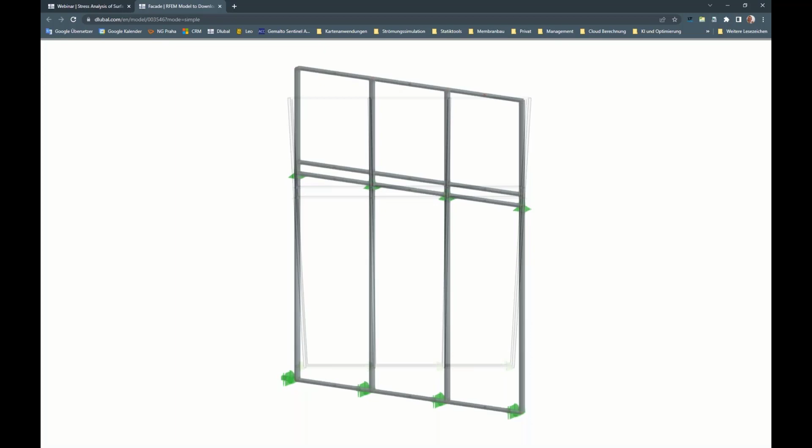Of course, in my style, I always want to present all these features in a short story, and therefore I prepared some models. For this webinar, on the bottom here, my colleagues already uploaded the models I want to present today, and we will start with a facade model from members.

Here we model it and we try to design the members by stresses. Then we fix this facade on the concrete slabs by modeling such a console. Here we take care about design of surfaces and design of welds between this angle and these ear sheets.

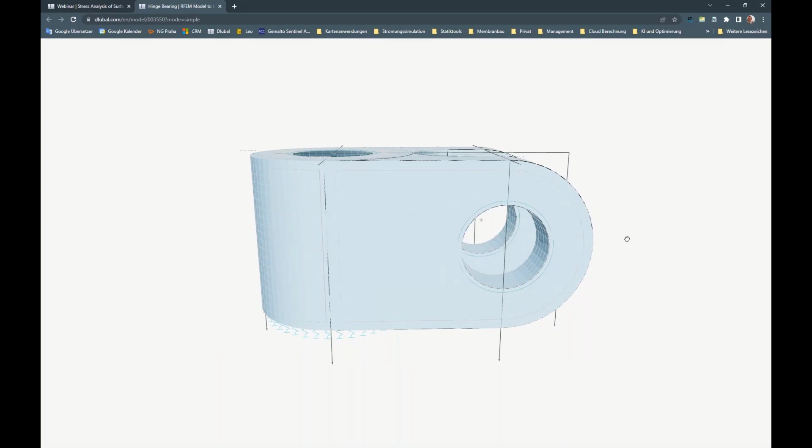And last but not least, we take a look at a solid model. I want to show how you can design such solid models with the add-on, how you can detect stress ranges, and how you can do solid sections. This is the introduction to what we want to do in the next hour. And now I change directly to RFEM. I prepared an open RFEM here.

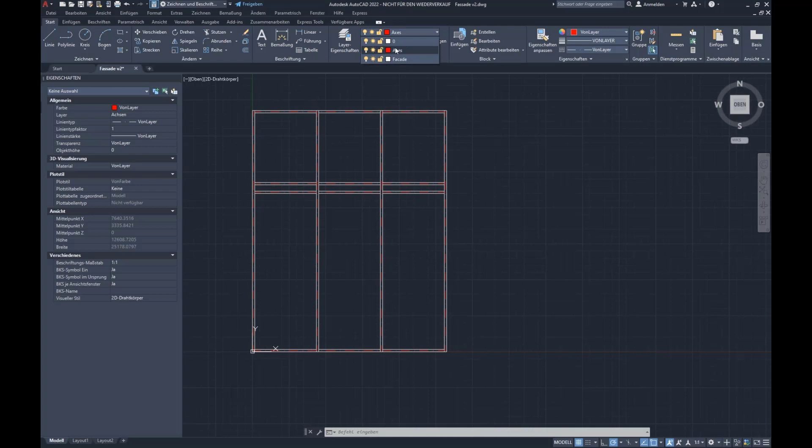Of course, we can start modeling this facade by giving this grid. But when you're starting modeling facades, you always will start with a drawing from the architect. I prepared such a drawing in AutoCAD with 2 layers, one with axis, one with facade. And I take over this geometry directly from the opened AutoCAD sheet into RFEM by using the import function. Here's this direct interface to AutoCAD.

This is quite comfortable because you don't have to take care about geometries and you can take it over directly. The only question the program wants to know is how it should orientate it, because AutoCAD has a different coordinate system than RFEM, but our developers implemented a nice option to rotate or mirror it. For this model, I would say the y-axis is Z, and the z-axis we will mirror.

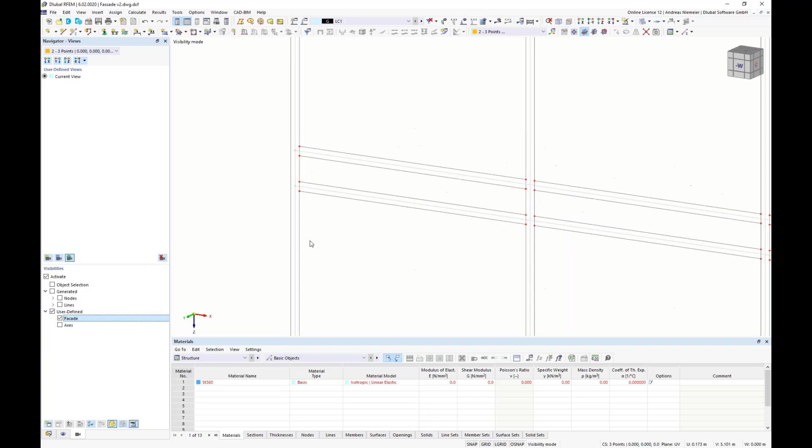To be organized, we say, please take over the layers from AutoCAD into visibilities. If we confirm the dialog, you will see the facade appear in the background. As expected, we get 2 user-defined visibilities, 1 facade, the outer layer, and 1 axis layer. For our purpose today, we only need the axis layer, so the facade part we will delete. I select it and remove it.

So now we know exactly how big the facade is, what the dimensions are, what the grid spacing is, and we can go ahead modeling this structure. For this, of course, we take a closer look at this model and see, okay, they drew this facade with the lines from left to right and drew over these mid elements. This is not really suitable for RFEM because you have to define some contact definitions. So we repair it with this intersection function and create single lines.

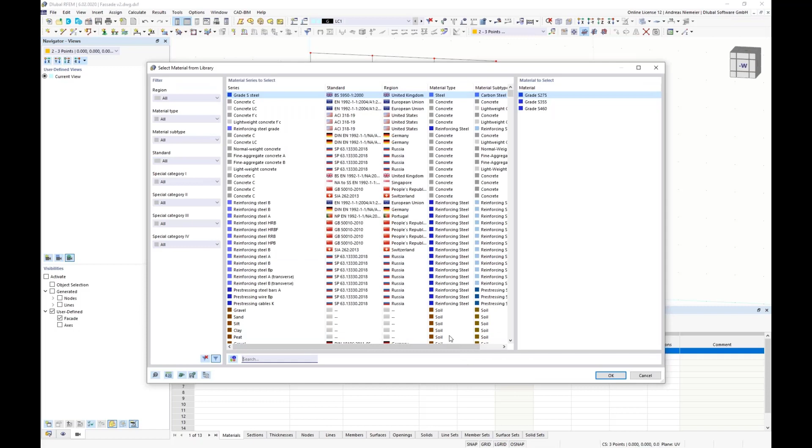In the next point, we try to add members with suitable cross sections, and for this I prepare material and sections before. Therefore, I open this material table. You see the program already defined a steel with sections from the AutoCAD drawing, but we don't need a steel, we need an aluminum here. Therefore, I delete this import and define a new material by using the keyword search 6060 and select, for example, this T6 aluminum from the Eurocode solution and confirm it.

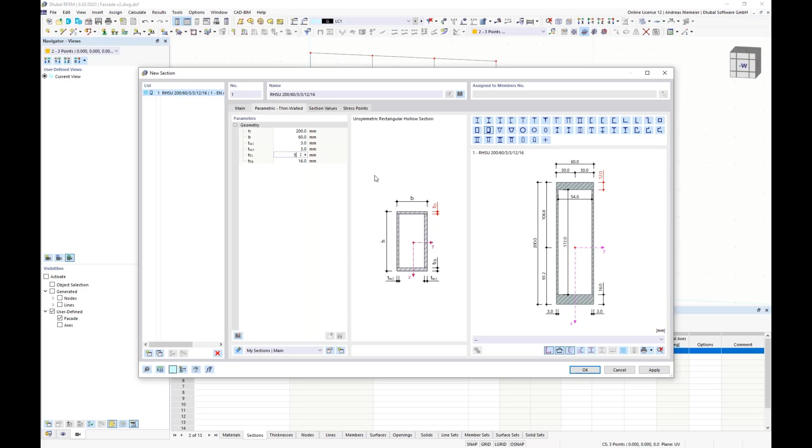Next, I go to the section register and define the cross sections. These two drawing sections I delete and define two new ones, one for the columns and one for the horizontal elements. For the columns, I open the library, and because it's an aluminum facade, I have a rectangular hollow section, and we prepared a special cross section for this. It's a rectangular hollow section where you can specify the thicknesses individually, which allows you to simulate all these cases simplified. I define a height of 200 millimeters and a width of 60 millimeters, for the thicknesses 3 millimeters in both directions, and for the short thicknesses I use 5 millimeters.

And because we have a similar cross section for the horizontal members, I select this already defined cross section, copy it and modify it so that it fits. So I change it here to 180. Okay, now we have prepared everything and we can start assigning.

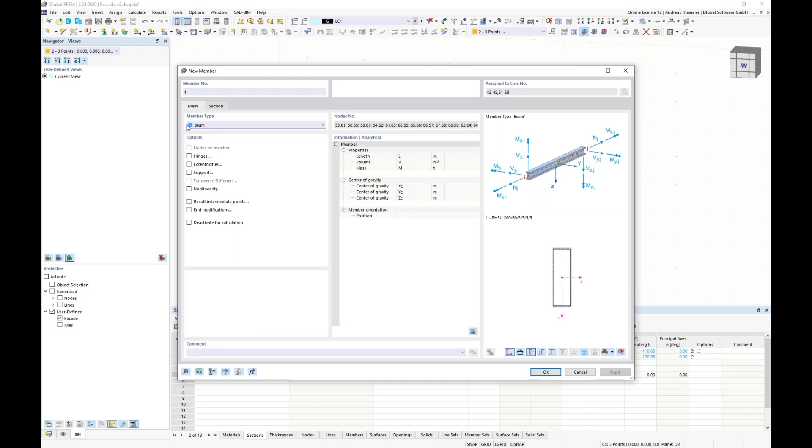So I select these vertical lines by pressing Ctrl at the same time, go into the properties of the line and select the option member. This tells RFEM that it has to apply a member with a specific type. We use beam, and as cross section we use the first one, and after confirmation the program distributes this cross section to these lines. The same we will do for the horizontal elements. So we select them, right click, edit, members, the same action as before. The only change is that we use the second cross section.

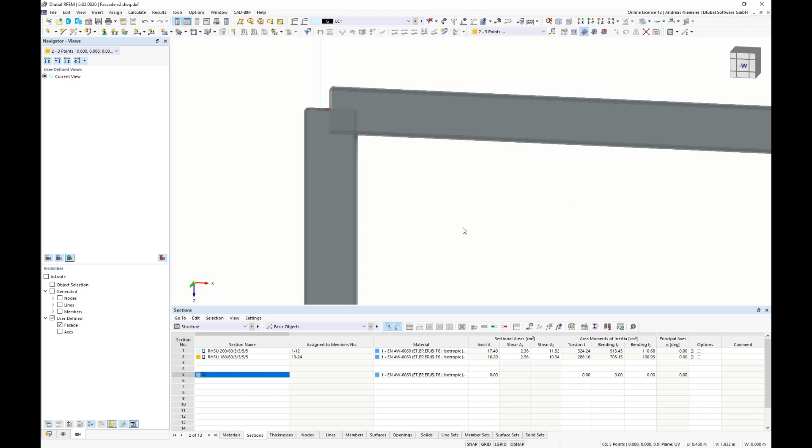So far everything was easy. If we now take a closer look at this facade, we will see that the program has rotated the cross section in a wrong orientation. This comes from the basic definition of how the members are placed in space, but it's not a big deal because we can open the section list, select both cross sections, use the section rotation and define, for example, 90 degrees. After confirmation, you will see the program orients the cross sections as expected.

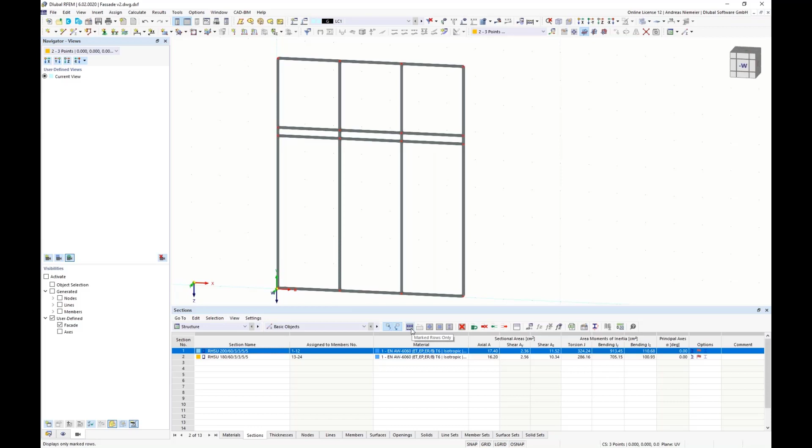So far, we have now defined the grid of members, and we can start adding additional properties like, for example, hinges, and bring in some organizational stuff. For the organization, it's interesting: when I move my mouse cursor over these members, you will see only the elements between the horizontal elements are selected, but in reality these elements belong together because they're manufactured from one beam. Therefore, I select all these members and say in the context menu, members, please be a member set. The program realizes four different sets, and now we have defined them as member sets.

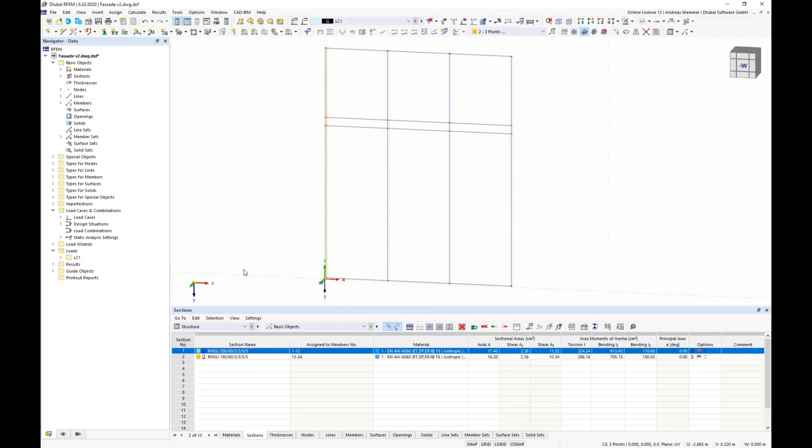Next, I want to introduce a new, let's say special feature from RFEM, which should help you with organizing the structure and also with design. Please open the base data, open the settings and options register, and you will find at the bottom two options, member representatives and member set representatives. We will activate both, and if we confirm it, you will see red bubbles above the members, and you will get two items with a setting.

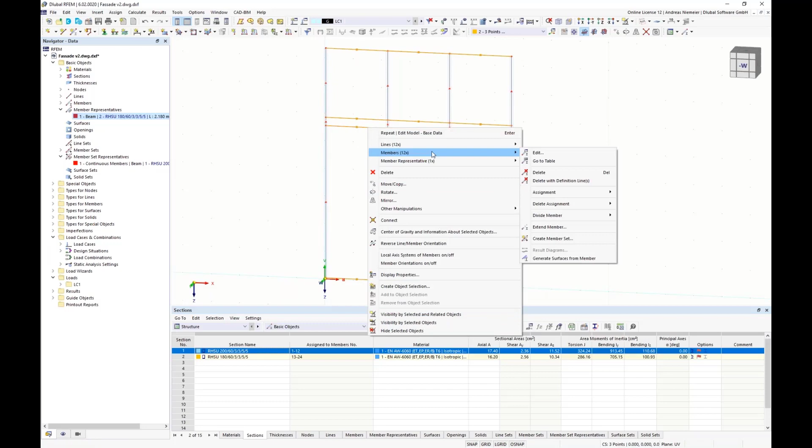This means the program realized we have similar elements for these horizontal elements, and also similar elements for these vertical elements, and it could be many more. So the program realized two unique positions from these 24 different members. And this is now easy because we can use these settings for defining some stuff, for example, hinges. I can select all by using this option and say, yes, of course, we have a hinge on both sides.

And later we can use this definition for reducing my documentation, because I can document only these 2 elements, because it uses the biggest forces of all available elements and outputs it in this definition. But I will show you when we have these results.

Now the structure is so far ready to apply boundary conditions. Here I'm starting with the load boundary conditions, which means we create the load cases self weight and wind. For self weight, I open here the list. We can define here the name, self weight, and then we take a look. Of course, the self weight is activated here, but we also have to consider the weight of the glass.

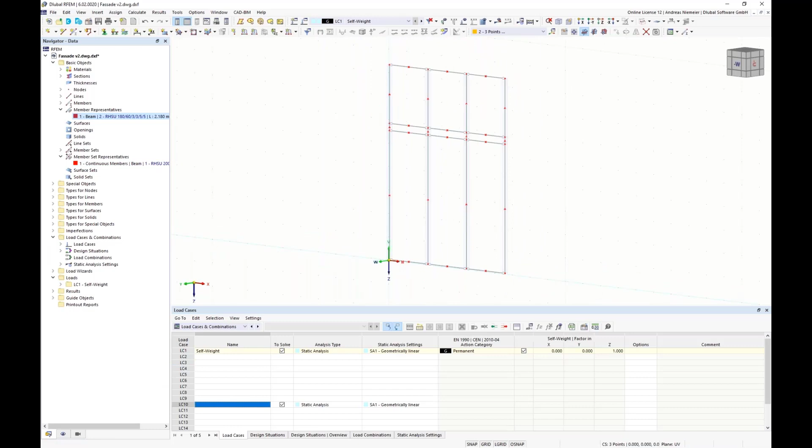And if you have to model such a facade, you know the glass is not inside the members, it's in front of the members. Therefore, it brings us a torsion bending moment on these horizontal elements. And how can we consider this? We can consider it with a load, and to know where the eccentricity should run, we activate here a member axis system. This shows us that for all elements, the z-axis points into the monitor. So if we assume the glass is in front, we have to define the eccentricity in -z direction.

Now, let's apply the load of the glass panels in front of the facade, and here we take a member load with type NX, where I can say, okay, let's define here 3.75 kilonewton, 2 pieces of it, and we place it here at 10% of member length plus 80. And we define here a load eccentricity, which should run in Z direction with -160.

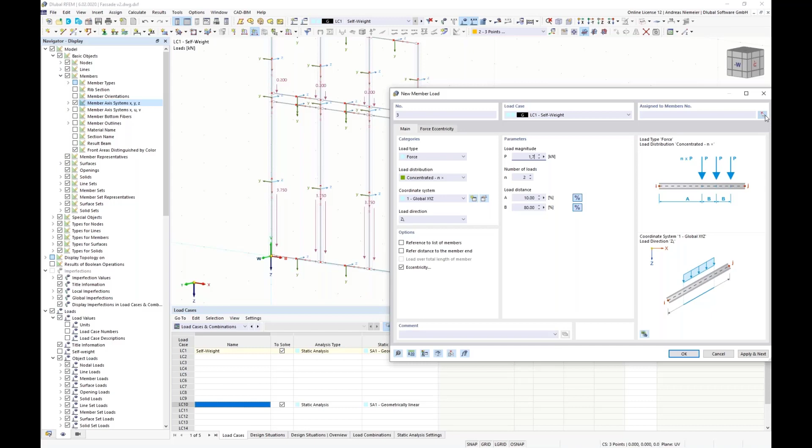So now we can say this load should be applied on this member, and for the others we do it similarly. So if we close the dialog, we can take over the basic settings with this overtaking function. And now let's write here 0.2 for the small panels. So let's select these members, apply and next, and the last one is 1.7, and here are these 3 members. So this was a quite easy task to apply such loads, such dual point loads. And now we go over to the next load case.

For me, it's important now to present this stress strain add-on to have some different load cases. So we need something. In this case, it's a facade, so we apply a wind load. Here I use the category wind. Okay, and let's apply the wind with a wizard. Here we offer a member load from area load wizard, where we can say the load could be, for example, 0.7 kilonewton per square meter.

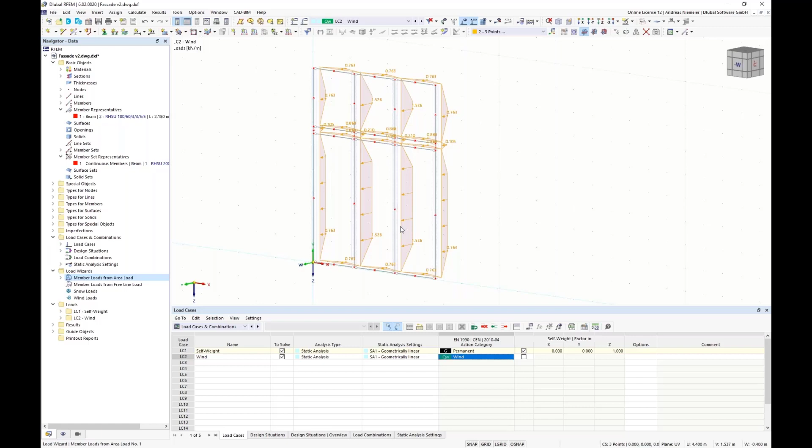It should run in Y direction, and it should act on all of these cells where I draw a window above. And now, after confirmation, we see a symbol which symbolizes this load, and behind, if we display it separately, you see it will distribute it as expected to the members, but for a simplified display, we can use this picture here.

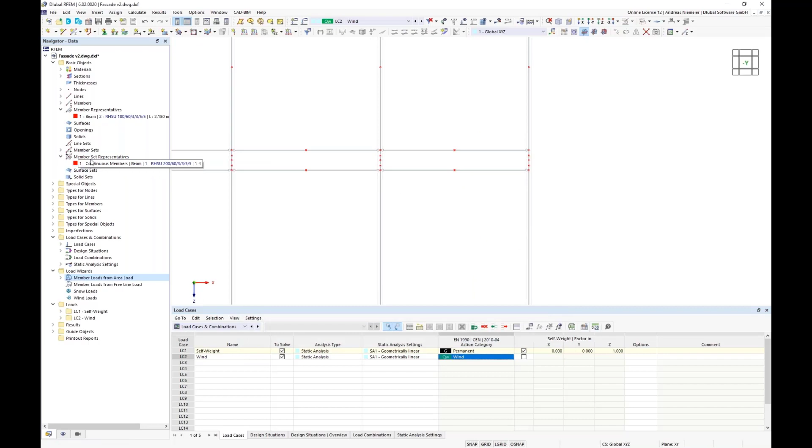Now, we are almost ready. The only point that is missing is the boundary condition for the support. And here we take a look. Maybe let's use here the global coordinate system, and we support it in the middle, so here, and therefore I select this member and divide it in the middle with one node. Of course, the member representative remains because it belongs to the member set, and now we can use these nodes and apply here a nodal support, which is fixed in X, Y, Z, and the rotation about Z.

And so far I can fix it on this slab here. And for the bottom, we take a similar boundary condition. The only thing I do here, I release the z degree so that I have free movement in this direction, and apply it to these nodes here.

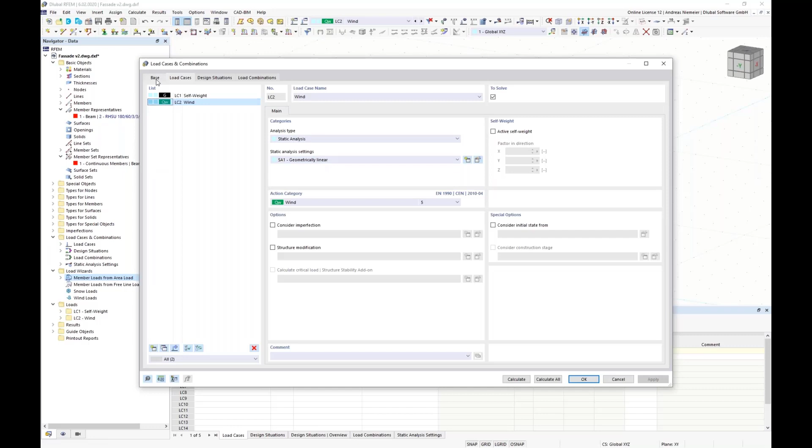Now my structure is almost ready. We have supports, we have loads, we have a structure from members, we have member representatives, and the question could arise how I can design it according to stresses. To design it according to stresses, we need a combination of loads, which means I want to combine it according to this rule, for example according to Eurocode 0. I use a wizard for it. And the wizard, let's say, thinks we have to do a complete job.

So it offers us ULS and SLS checks. For my presentation today, only the ULS checks are important. Therefore, I remove it. And this means now with this setting that the program generates combinations according to this law here. You see also this box is empty here. There's a lot of free white space. The question why, I will answer directly.

But if we go to load combinations, you will see the program creates here these load combinations according to these defined loads. But how can I tell the program that it should do a stress check for these members? For this, you have to open the base data, go to the add-on register and activate here the stress strain analysis.

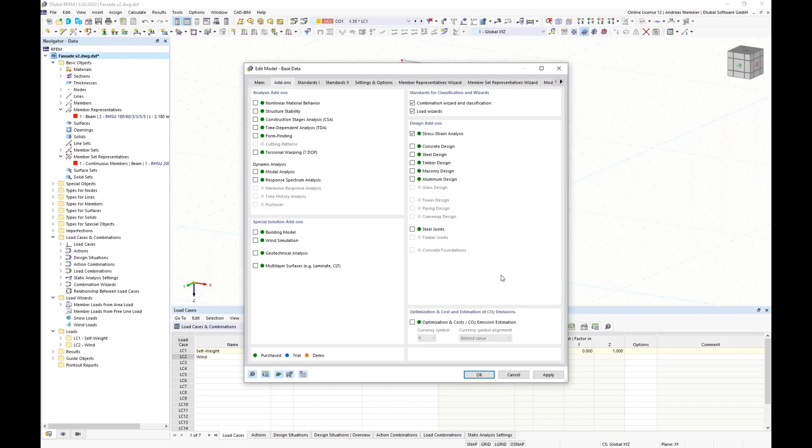For the presentation it's good that I activated it afterwards, because when I activate it afterwards, we get a new calculation task, a new table, and stress strain analysis here in the Navigator. But if you go back to design situation, you will see suddenly we get here the option stress strain. And this is a really important fact, because now this design situation, DS1, including these combinations, knows it should run a stress strain analysis. Of course, I can deactivate it, but it knows it should do it.

And if we calculate all, the program runs all available load cases and combinations, and afterwards it runs a stress strain analysis. So static analysis is done, we get deflections and forces and so on, but now we get also a result stress strain. So this is the game behind. You define in base data what you want to calculate, and the design situation is the basket of forces that will be moved into the stress strain analysis.

To understand it in more detail, we open now the table of stress strain, the input data, and you see it's matching. In the first table, you will see DS1 is activated. In the second table is activated what should be analyzed. Here we have members, member sets, member representatives, member set representatives. Everything is checked. This is the standard setting. You see the program will design everything it gets in hand. So these objects will be designed.

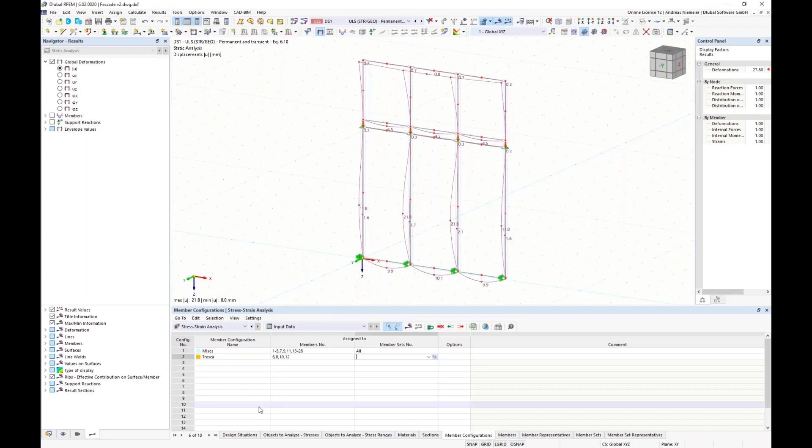And this is not only one setting, you can have several. For example, we give here a name, Mises, and we use a second, for example, Tresca. For the Tresca setting, we define the Tresca option. Now if we confirm this, the program wants to delete results, and we can say this Tresca option should be used for these 4 members. What happens? The program says this member should be checked with the Mises setting, this member with the Tresca setting.

An overview of all this you will get in the last tables. For members, you see member 1 is checked with this, member 6 with this. So you get an overview in the table, but of course you get the results of all these settings graphically too, because in the results now you get not only sigma tot and tau tot, but also sigma von Mises and Tresca. Mises is defined for all, Tresca only for these 4 members like we did it.

And because this is only the existing stress, you can also visualize the utilization. So here you get the utilization visualized as diagrams on members.

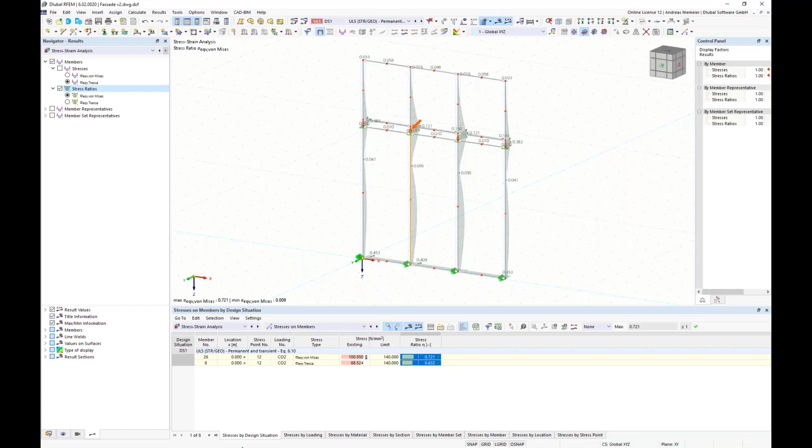If you watch all these results, you will see we have stresses on members distributed in different ways. For example, stresses by design situation, by loading, by material section, and so on. You see this load gives this result, that load gives that result. For example, by location on every X place, you can go through every X place of stress.

If you say, oh, this stress is interesting, I want to know more in detail, you can open the details, and you will get an environment which shows you for these coordinates the material properties, the section properties, the forces on this X place, and the stresses, and the formula which leads to this utilization.

If this is not enough and you need more detail, you can open the cross-section layout and get the utilization or stresses visualized over the discretization of the cross-section. Here we have a stress layout, here a utilization layout, and if you're interested in stresses itself, you get stresses from normal force, from bending moment, from normal action.

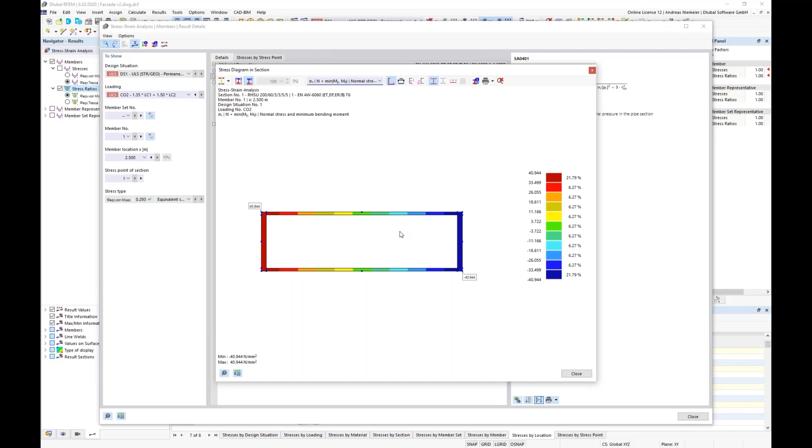So all these things you can display if you need it, but in standard you get everything visualized as these diagrams.

Now, if you watch all these endless results, we know as engineers the biggest one is interesting. You get it here, and if you need it for different positions, let's use these representatives. Because this representative tells you this member is the biggest result for this horizontal element, and this is the biggest result for the vertical elements.

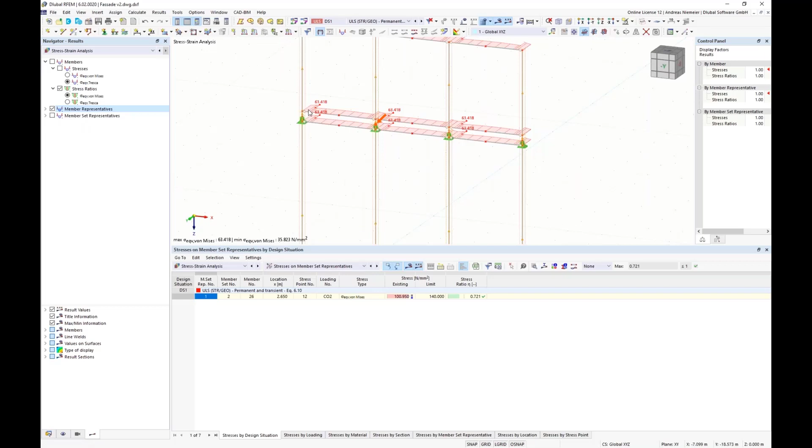And if you visualize it here, not by members but by representative, you get the biggest result overall visualized. So everyone has the same result because it's unique, and it's representative of all these members.

So this brings me to the end of this example. I want to show you here, maybe to repeat, how you can model a small member structure and how you can make a stress check for these members and representatives.

Now we want to extend it, how you can use this add-on for a surface model. We imagine we have to fix this facade here. We read in the static analysis that we get forces, maybe 16.3 kilonewtons downwards and 14.3 kilonewtons out of plane, and we have to overtake these forces from this framework model to the concrete slab.

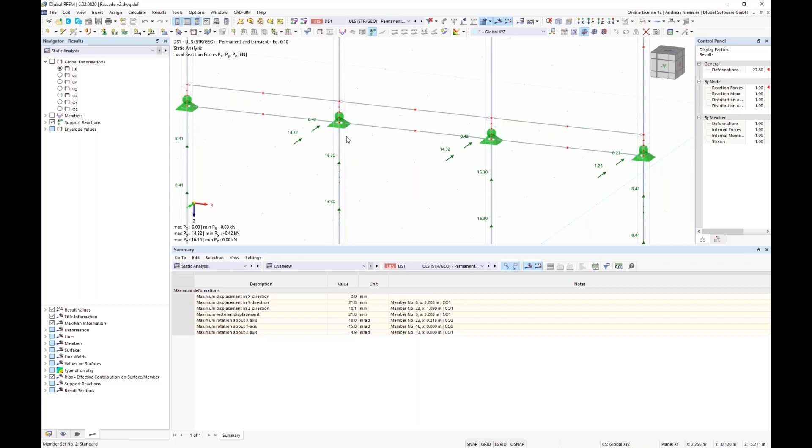And how can we do this? Here I copy this member into the Windows Clipboard with Ctrl+C and open a new model, and we say here K5, for example, and activate directly stress strain because it's our task today. We confirm this and we get an open model.

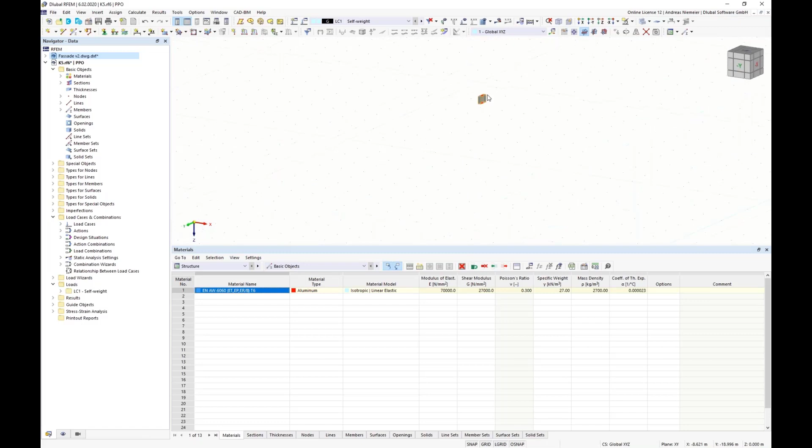Now we set our focus in the middle and press Ctrl+V. The program asks me if it should give an offset for this model. I don't want that, and we get this member fragment here in my model.

If we display this wireframe model, you see it's a member with a cross section, and if we select this member and go into the context menu, you see we get an option to generate surfaces from member. This gives us now a surface model discretization of this cross section.

Here we have the surface thickness 3, here the surface thickness 5. But in fact, we need only the floor plan of this structure.

So if we take a look here, maybe let's deactivate this table. We have now to fix this facade to the concrete slab, and we have to model here a console that can overtake this. And this is my basic geometry that I should overtake.

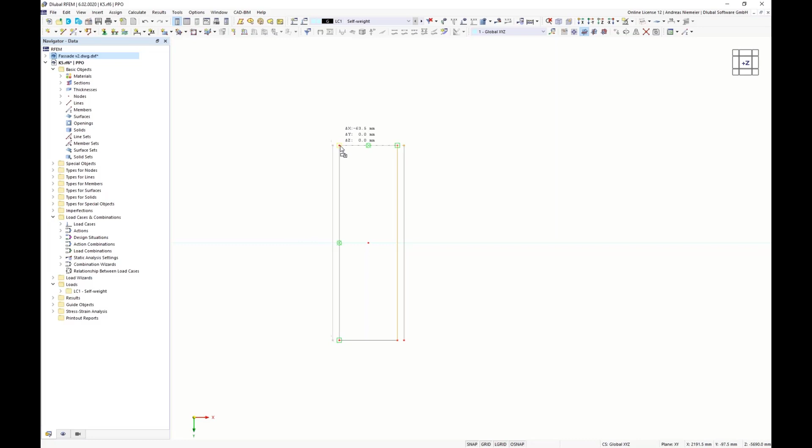For this, I select this line here and say I have to move it in the right direction, and we copy it. We use millimeters for better description, and we move it in the X direction, plus 1.5 because it's half of this 3 millimeters, plus the thickness of the console, maybe 10 millimeters, and a half or 5 millimeters. I can calculate directly such inputs, and with confirmation we get the line on the right side. The line for the left we can copy by drag and drop.

Now we know the surface members here don't have to run completely to the outer edge of this cross section, so I shorten it a little bit. In this case, I don't create the copy, I change it here with minus 30 millimeters and confirm it.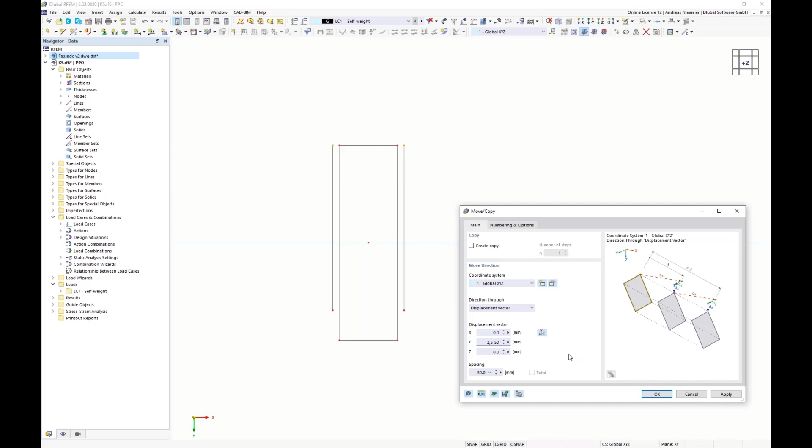For the other side here, I select these nodes and have to extend it to connect to the concrete slab. So I use here a modification in Y direction with minus 2.5, minus 50, and minus 5 again, and these elements will be extended here.

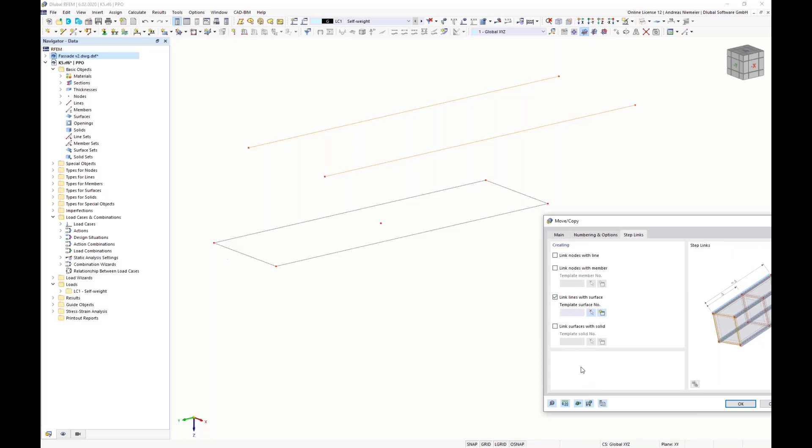Now let's create the first metal surfaces. I select both lines and move it a little bit upward at first, with minus 50 millimeters. Now we draw from moving it down with a copy with 100 millimeters, a new surface by defining the vector, and using step links, saying please create a surface in between. If I confirm it, I get here my surfaces from these elements.

Now we can create the first part of the angle which connects to the concrete. Here I use a function to create a node between two elements, for example here, and we create the standard node and apply it.

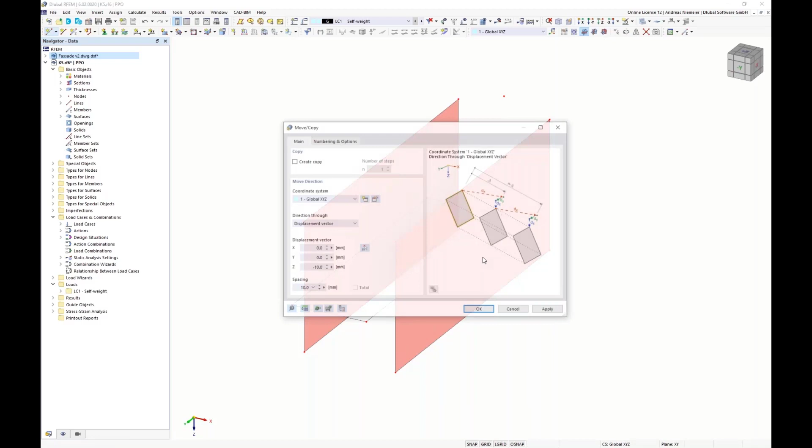Now we can copy it directly on the bottom and move this 10 millimeters above. So we say here minus 10. Okay, and the same for this node here, also 10 millimeters.

Now we know the height of this back element. We move these nodes now finally here in X direction, for example 100 millimeters in X direction, and create a line in between.

And then we draw a new surface, create copy with... oh, I made an error, I think, again. This is 10 millimeters, I should remove.

Okay, now we can make a line in between and draw a new surface by using the vector minus 200 millimeters, create copy using step links with a new surface and connecting it. Then we have almost all elements done.

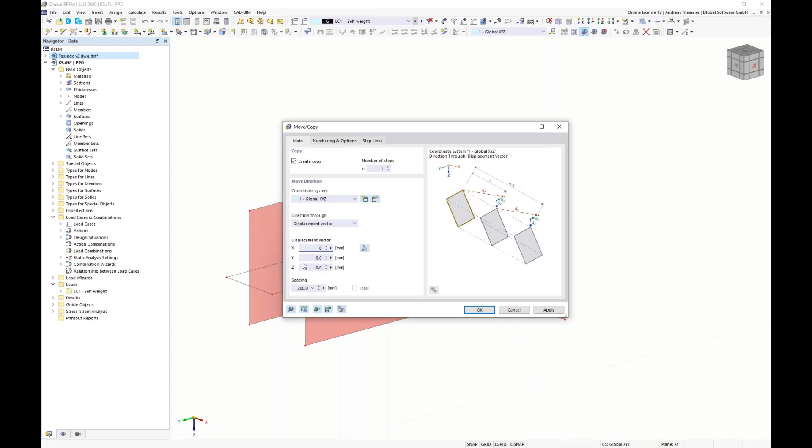The only thing missing is maybe the upper part of the angle, and here we use the copy command again. We zero this, and in Y direction we use minus 150, creating a new surface. So far, this was the modeling of such a console. Pretty easy, I would say.

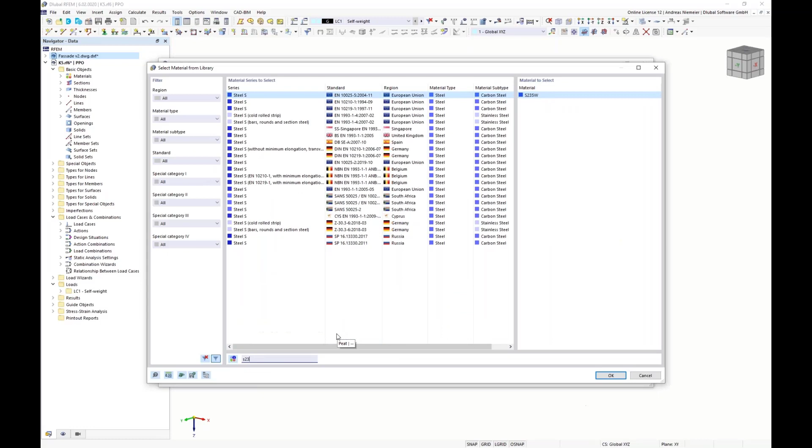At the moment, the surfaces are red because they don't know their thickness. We select both and define these surfaces, setting stiffness type standard and assigning a new thickness with 10 millimeters, and we would like to have a steel S235 from Eurocode, for example. Now this is assigned and the console appears in blue.

In the next point, we should take care about boundary conditions, how it's fixed. We know this angle will be supported on concrete, therefore I define the coordinate system for the surfaces or display it. I see it's showing in direction to the concrete.

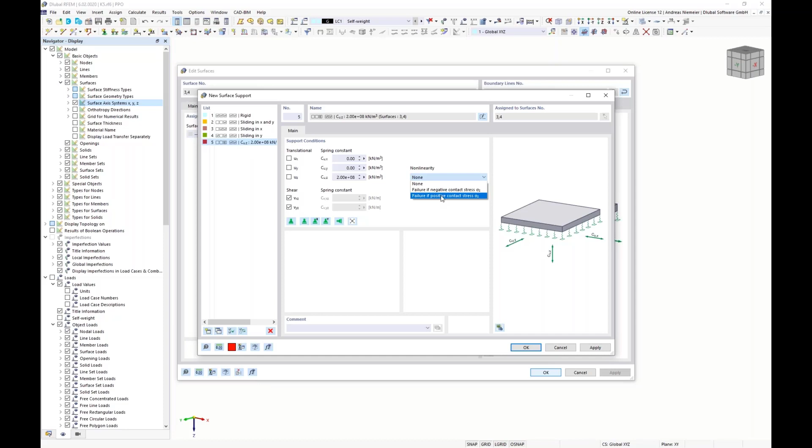I select both surfaces and define here edit a support, and select here support condition. I don't check it because I think it's unrealistic. I define here a pretty stiff spring and say it should act only in direction to the concrete. In negative direction it should fail. And we have here these springs.

In the next situation I have to take care, because it's not supported but it can be removed, so I have to fix it against tension, so we have to use anchors here. So I use this corner node, create here a copy with minus 50 and in Y direction with 50, and let's create a node. We get it here, and the same for this node where we only change this minus, and get the place where the anchor should be placed.

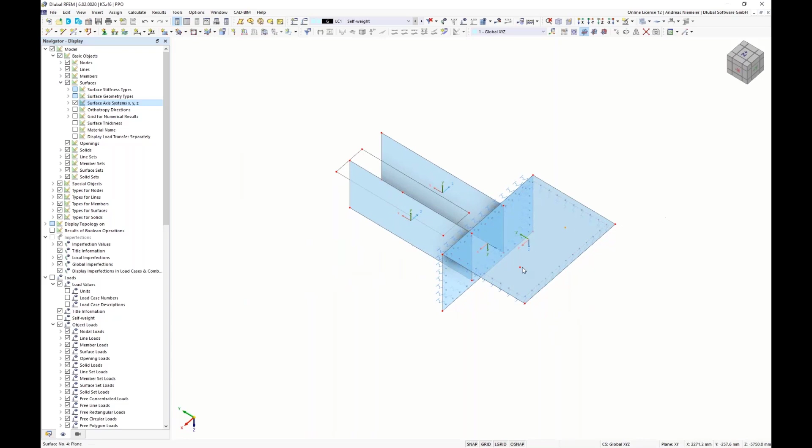The anchor has a diameter of 10 millimeters, so let's define here a hole. We pick this and define a radius of 6 millimeters, for example. The same for this. And we know now this node will be supported.

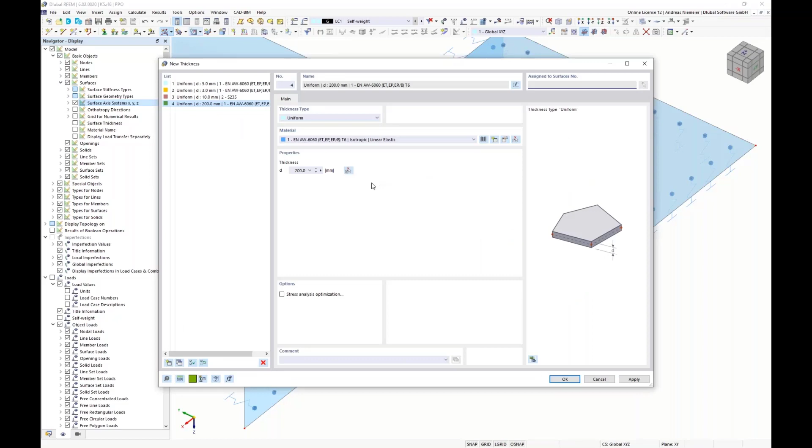Okay, and now we place this surface inside this hole. Now we can place a nodal support here. We define a nodal support without rotation fixation and place it on this situation.

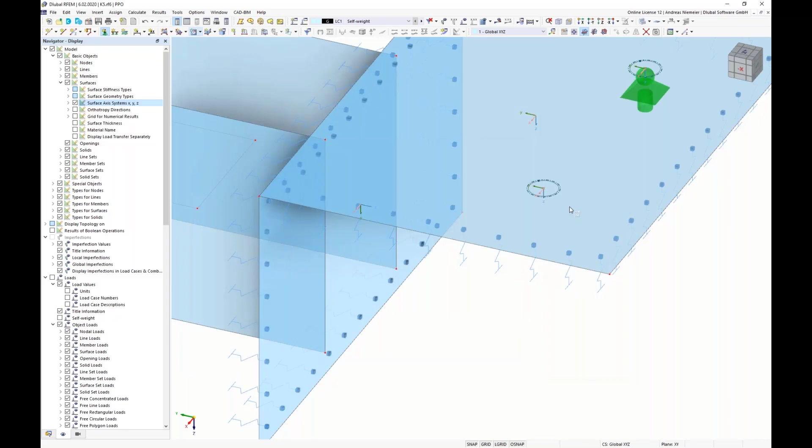And now we do a second one. The only difference is that we release it in X, so that we get no unrealistic strain or stress in between. So now we have modeled this situation.

In the next instance, we have to model the place, or the load introduction. It will be introduced in the center of gravity of this floor plan of this column from what we copied initially.

For this, I create only a short member here. To know the intersection points, I draw a window above this line, and you see it will cut it directly with the cross section. The remaining elements I can remove.

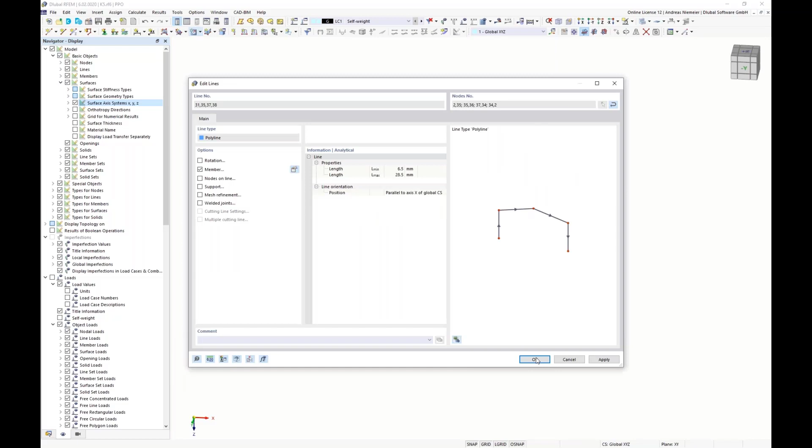And now I select these lines and give these lines here a member stiffness. I say it's a member, and because it should only transport forces, I use here a rigid member. Now I can place my load on the middle point, and this rigid member will transport it to this surface model. The only thing missing is that I have to introduce it here to this surface model.

Therefore, again, I model here a hole with diameter of 20, so I define a radius of 10, the same on this side. Okay, and let's introduce again this membrane without tension with this thickness, number 4, and place it here inside this hole. Now the model is almost ready.

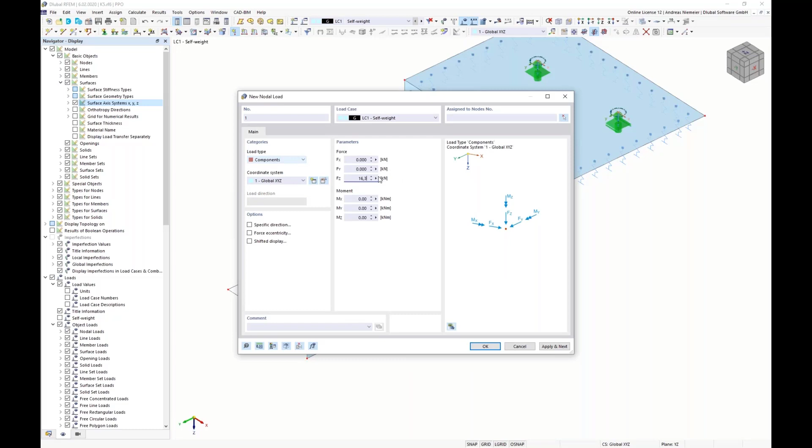We should define only now these forces from the facade, and if we remember right, we have 16.3 kilonewtons downwards. I use this component solution, so 16.3, and in Y direction we have, I think, 14.3. Now we place it here, and you see the result.

We place it here. The load will travel into these sheets and will be moved to this surface support and nodal supports. To get good results, we should mesh it fine. So we go to our mesh settings and define here, for example, a mesh of 10 millimeters.

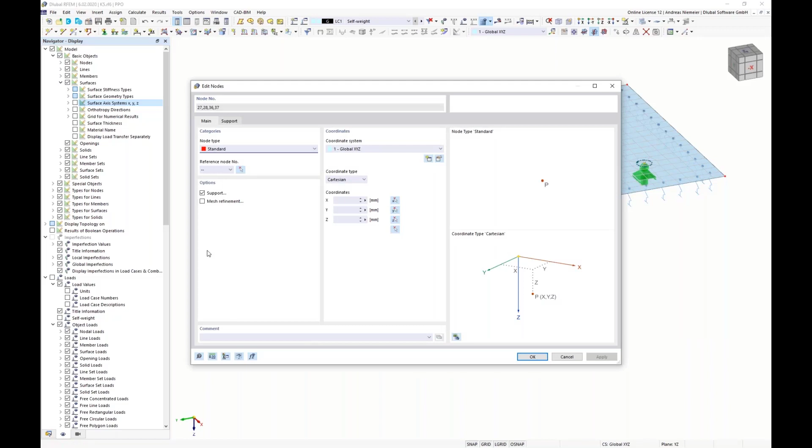If you see this mesh, it looks globally nice, but I expect that we get here some singularities. So I refine the mesh on these nodes here, right click, edit, and we say we have here a mesh refinement where we place something like a globe or sphere around where the mesh will be reduced to this size.

And the same is on these connection lines, because here we also have some issues, I would say, where we need here a refinement. So let's take a mesh refinement, define here a condition, maybe target length is 5 millimeters.

And now if we mesh this model, you will get something what is expected. It will be refined here, it will be refined here. So far it looks nice, and if you don't want to see these symbols, you can remove type for nodes, for example, and also type for lines.

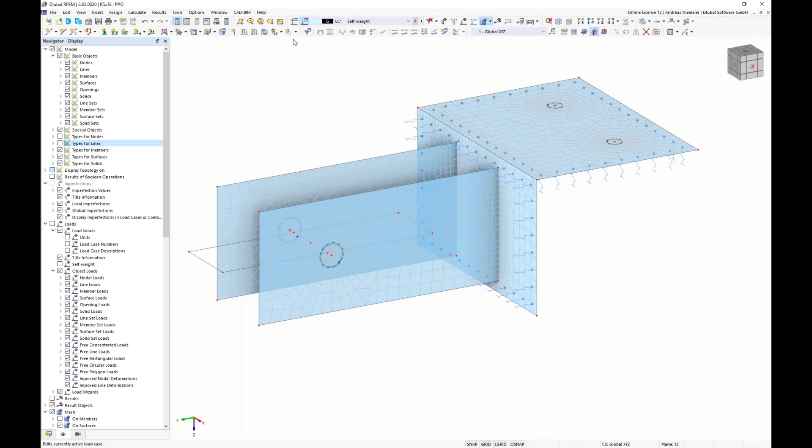So far, now we can start calculation. But the only thing missing, we have to tell the program that these loads, 16.3 and 14.3 kilonewtons, already contain gamma factors.

For this, we should remove this wizard. We should say this load case is fine, and here we will only take a look on this ULS setting. Stress-strain is activated, and this should be done for a load combination with DS1. And here we say, please consider this load case, because it could be done linear.

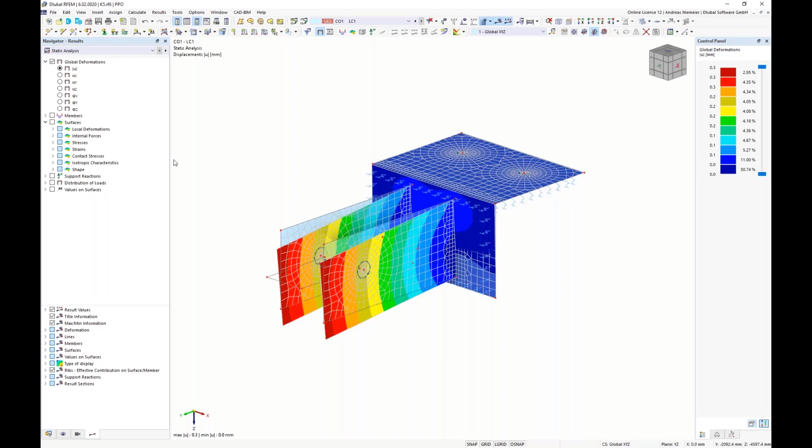And if we calculate all, we get the static analysis, mentioned with SA, and the stress analysis. From plausibility control of static analysis, deflection goes downwards with 0.3 millimeters, it's fine. And the support forces, maybe contact forces, is also fine. It will be pressed against concrete and supported here.

So far, I would say the model reacts as expected, and from stress strain analysis, you will get here, similar to the member model, a selection of stresses, maybe von Mises stresses. Maybe take here stresses on surfaces, the existing one, and utilization against the limit stress, we get the utilization.

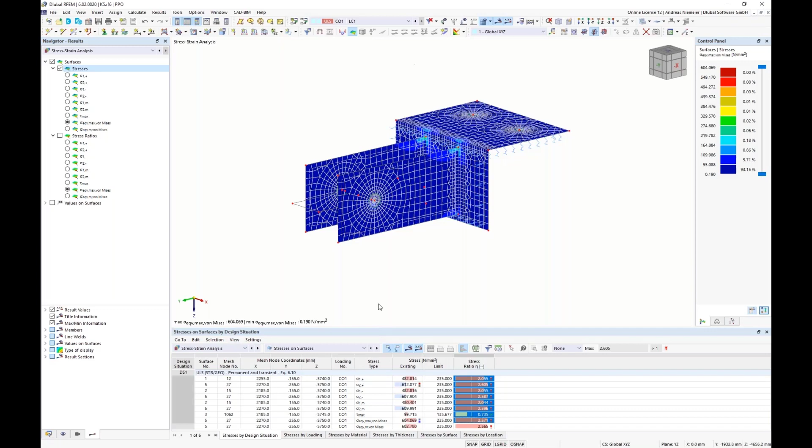Now, what is a little bit disturbing is when you read this utilization, or let's say these stresses, you see you are almost at 600 Newton per square millimeter, what is pretty high.

If you want to search where is this peak, you can define here a limit with 235, what creates you a special panel running to red until 235, and the peak over is only this dark red, and you see how it's only this singularity here and here.

So I think you can optimize by displaying only these elements what should be designed, so surfaces, stiffness type, standard, and you see, okay, now we have not 600 and 430, and the peak is here.

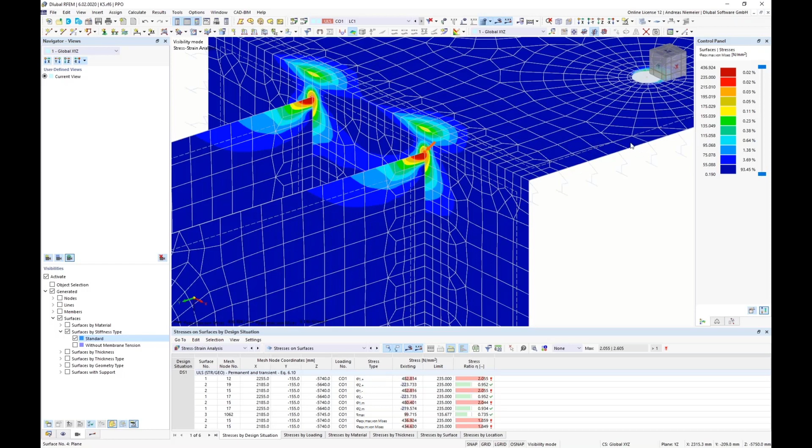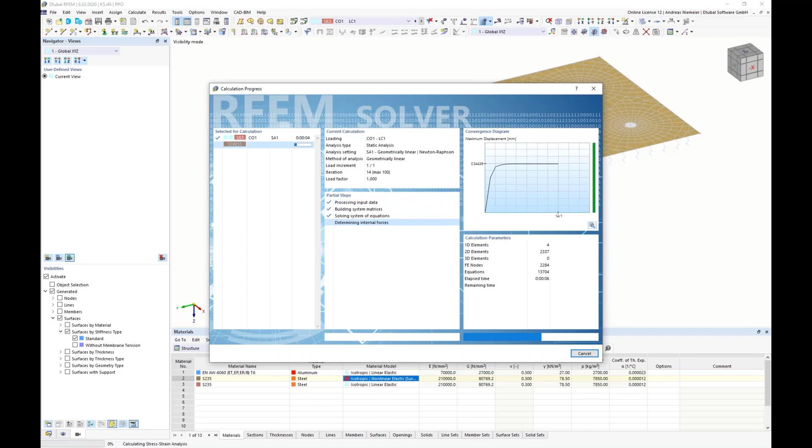How can we remove it? Of course, it's, let's say, a singularity, but in this case, for example, you can use a nonlinear material to use a yielding effect. For this, we activate here nonlinear material behavior and activate it for this material here, nonlinear elastic surface solids. And if we rerun the analysis now, you will get, for the existing stress, something up to the yield stress, which means we now have a yield stress of 235.

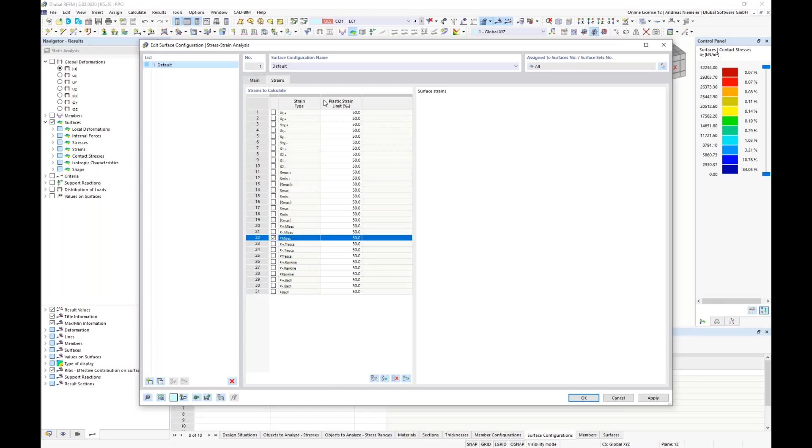So far, the results are okay. But the question is, do we have a yielding effect? And we have to check it. And this is also why the add-on is called Stress-Strain. You can also calculate strains with the add-on. You can activate it in the global settings. And if you go to the surface configuration, similar to the members with this table, you can say, please calculate only sigma equivalent von Mises, and for the strains, please calculate epsilon von Mises and compare it against a plastic strain of 50 per mille, for example.

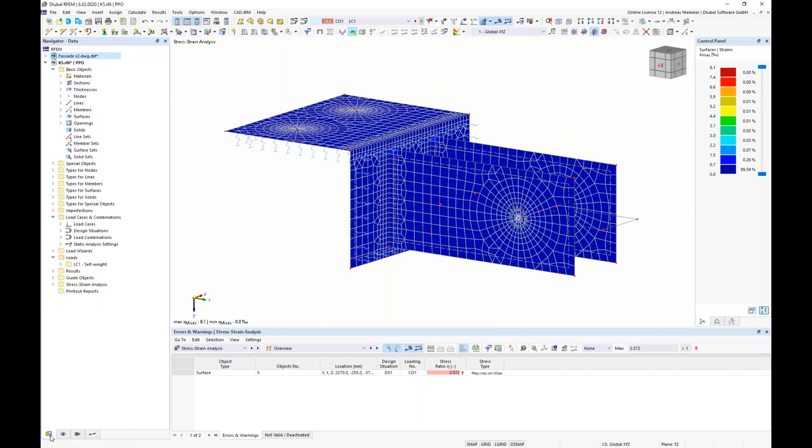If you have to weld these elements to the angle, we offer a new solution in RFEM 6. It's hidden here in the types for lines. You can place line welded joints here. It's a typical post-processing effect, which means you can define what the weld looks like: butt joint, corner joint, lap joint, T-joint. Here you can say the shape is a single bevel, double bevel, single J, or a double fillet. You can specify the size and place it in between, where you say this element should be connected to this element. The same for this element connected to this element.

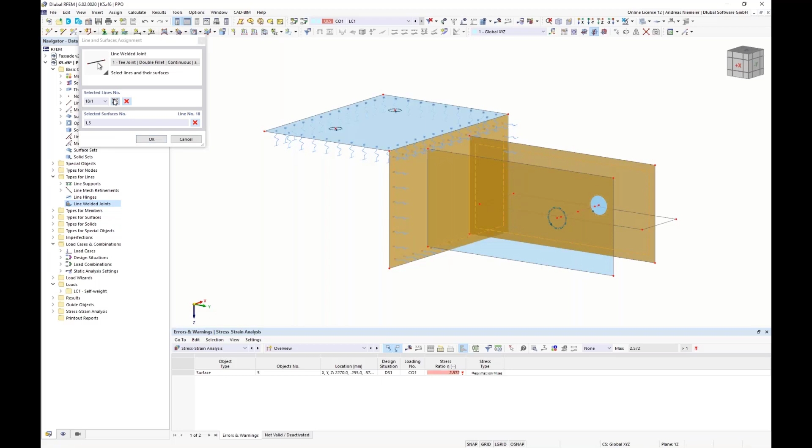And similar to members and surfaces, you have a stress-strain analysis where you can specify which element should be calculated. The program transforms the stresses on the edge of the surface to a normal load, bending load, shear along the line, and shear perpendicular to the line, where you can say, please use smoothing or no smoothing, and do you want to use a simplified or directional system. If you calculate the simplified system, you get a normal stress, a bending stress, a shear stress, a shear along the weld line, and finally an interaction of everything, where you can say, please check this value against the allowed limit weld stress, for example here 208.

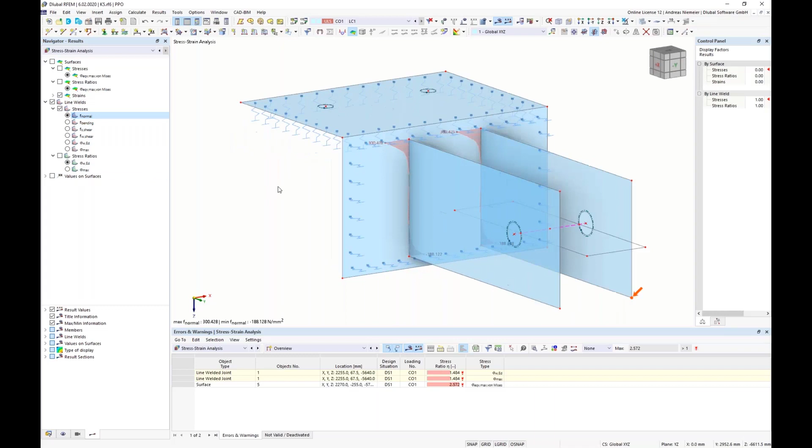It's calculated according to the formulas from Eurocode, but you can use it for all other standards, therefore we kept it open. When you calculate this, the program deletes the results from stress-strain, and after recalculation you get a result for surfaces, which we deactivate, and a result for the line welds. You see here normal stress, bending stress in X direction, surface stress in X direction, shear in vertical direction, and the interaction plus a utilization. And you see, okay, here we have a small peak that is overutilized.

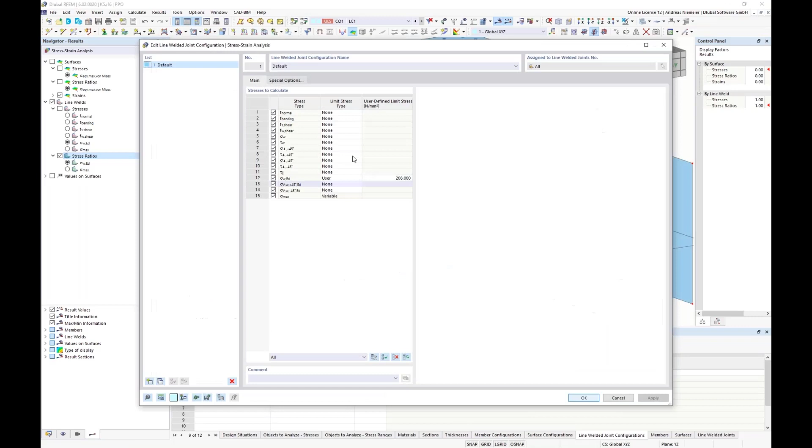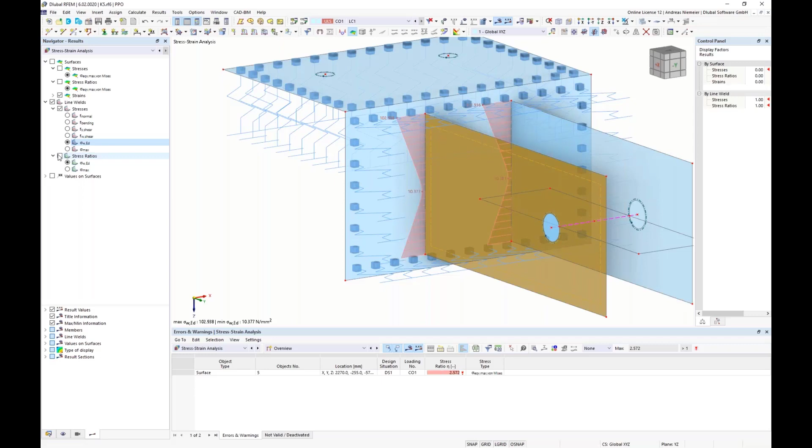If you see these diagrams, you ask, okay, it's nonlinear, clear, but if I do a hand check, I distribute it over the complete length. I know, therefore we give you the option here in the line welded configurations, in the special options register, to say, please smooth the normal load linearly, the bending load constant, and the shear loads also constant. And if you check this and recalculate the stress-strain result, you will now get a suitable result, because the shear load is now constant. And the normal load will be distributed linearly, and this results in a better utilization, and you can do the check. But it really depends on which stresses you use, smoothed or not smoothed.

So now we come to the next chapter. To repeat, we designed surfaces and line welds with stress-strain, and now one object is remaining, a solid element. And for this solid element, I prepared a model because I don't have much time today. I prepared a small knuckle here. Where is it, desktop, knuckle for webinar.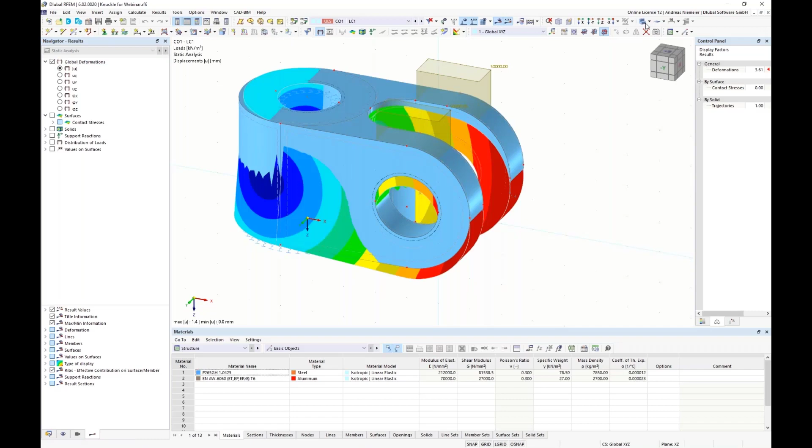If you calculate or display, make a plausibility check of this model, you will see the deflection is going downwards. What is clear? No? And for checking loading boundary conditions, you will see you get the restrainment for the top surfaces, pressure here, and in the inside, in the bearing, you get also pressure vice versa, transporting a bending moment.

So far, it's reacting fine, and it will give you stresses in X, in Y, and Z directions. You get extreme stresses, what is interesting for design, and you get also here strains. So it's different to maybe members. You get directly here internal forces like stresses, what is logical for solid elements. And the program will display you these stresses on the boundary surfaces.

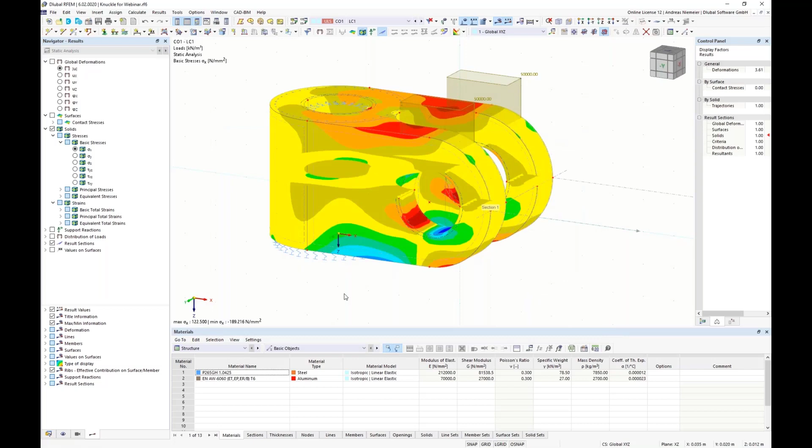If you want to look inside, you can create a result section and can define a cutting plane in structure. For example, we cut here in X direction. Then you create here a view inside the model. But all this output gives you only the result of this selected load situation. If you have more and you have to do a design, the question appears how I can do a design.

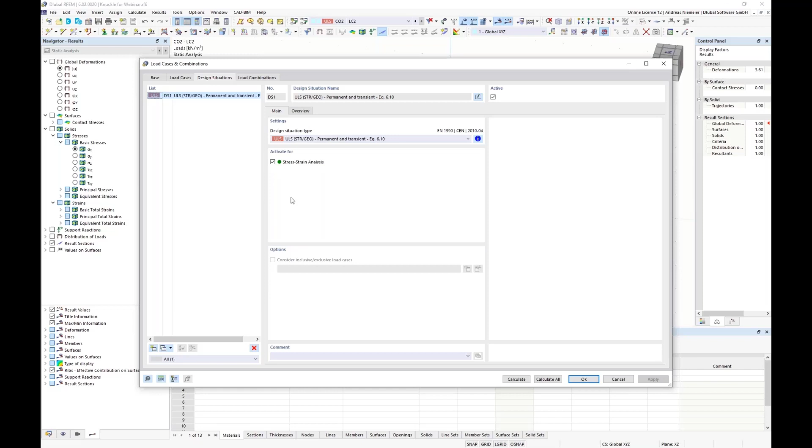And this is the task of stress strain, because the stress strain add-on gives you the option to check a series of load situations and gives you the biggest stresses from it. So if we have, for example, these two load cases in design situation 1, what is activated for stress strain, and you calculate stress strain, you get overall feedback for these two load cases. Let's activate it and calculate this stress strain analysis.

And you will see you get here tables, stresses on solids. If you take a look on the input table now, what I jumped over just, the program will grab solids, it will activate it, surfaces will be deactivated because they have no stiffness here. It will offer you also stress ranges, and finally it will give you these solid configurations similar like we know it for members, surfaces and line welds.

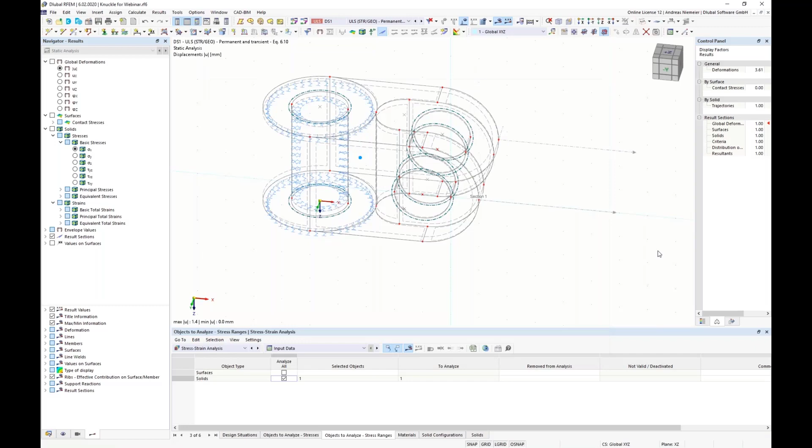Here you can say, please calculate me only this Mises part, and if you have special cast material, you can also check it against any user defined stress similar like for the line welds. And if you have also the task to calculate fatigue, you can activate here the stress ranges for solids, and if we recalculate it, you will get now 3 results for the solids. You will get stresses, stress ratios, and stress ranges.

If we take a look on the stresses, you will see now we have an extreme here and the extreme here. That is coming because the program considers CO1 and CO2 at the same time and gives you the biggest forces of both. That's the difference if you watch only the results of CO1 or CO2. Then here we have 246. You get the stress ratio check where you see the extremes are under the allowed limit stress. Existing stress compared to limit gives a utilization.

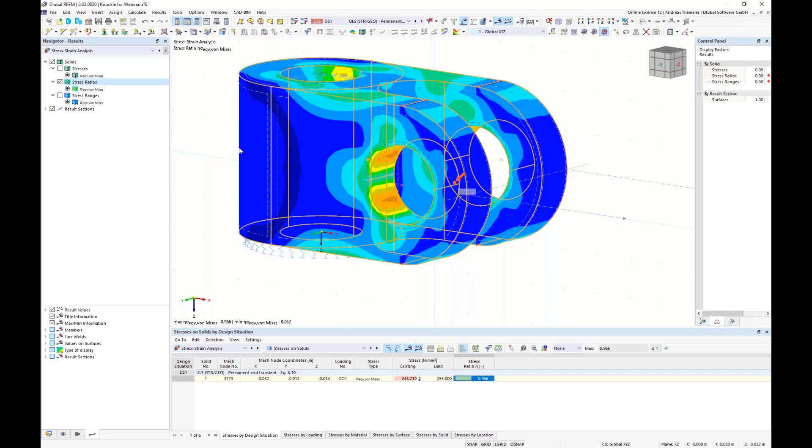And if you need ranges, please compare minimum to maximum stress. You can activate it, and I did it now for solids, but you can do it also for members, surfaces and line welds. The program searches from the considered selection, here only CO1 and CO2, the smallest and biggest stress on the same place, and gives you a range in between, and this will be output as colored skin above the model.

And this brings me now to the end of point 3 I want to present today, where I want to repeat what's important: stress-strain analysis can also design solids with ranges.

So now to sum up, stress-strain is here to consider a basket of forces, for example, one or more DS, for members, member sets, member representatives, member set representatives, surfaces, line welds, and solids, and it can check the stress ratio, stress ranges, and for a specific part also strains. And if you want to document all such things, we can use here, for example, our second model, our surface model here.

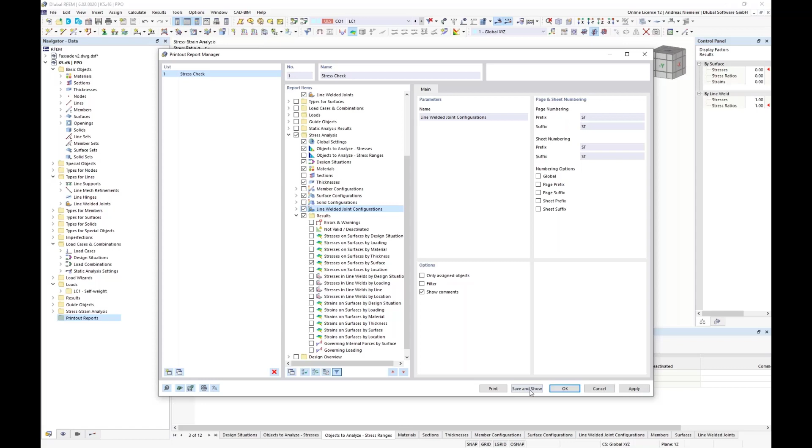So the stress analysis, the global settings, the objects to design for stresses, the design situation, materials, thicknesses, surface configurations, and line welds. And from results, we check here stresses by surface and stresses in line welds by line. And then you can create this document with all this information.

The program will give you a styled document with a header, with a content, with all tables we just checked. So line weld joints, double fillet, continuous, four millimeters, the global settings for the stress analysis, which objects, which forces, which materials, thicknesses, and the results with check or marked with red if it's not fine.

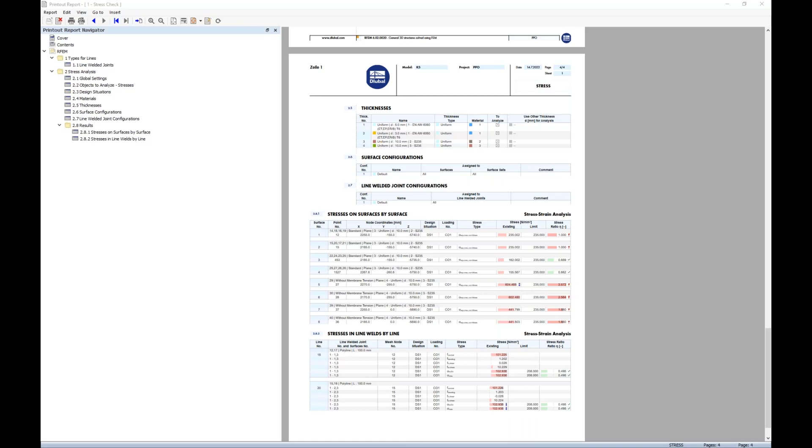And if you say, okay, I have to extend it with pictures to get a nice document, no problem. You can say, okay, let's open the stress-strain analysis and make a picture of the utilization of surfaces. And if you say it's really blue and I don't see the focus, you can say, let's visualize only the surfaces that should be designed, and use these so-called gray zones below the isobands.

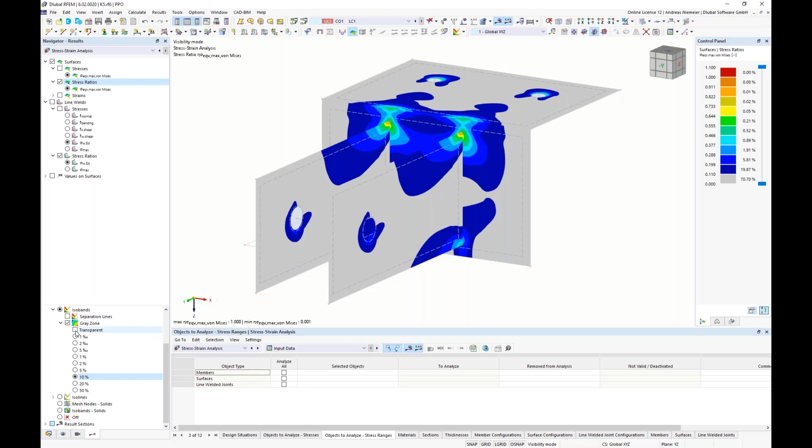This is a special feature which should help you to hide uninteresting parts. You can say here, please hide the 1 promille of uninteresting part, or maybe 5 promille, or maybe 10%. Then you see, it hides now 10% of the uninteresting stress, what is not so close to the limit, and the rest will be visualized, and then you can make a nice picture without playing with the color panel and see directly where it's interesting.

And you see, interesting is here the load introduction, here the load introduction, here the load transfer from this to this element. And now let's find a good placement in space and print the picture to report, where we say make window filling, with 3D option, for example. And now we move this picture into the report.

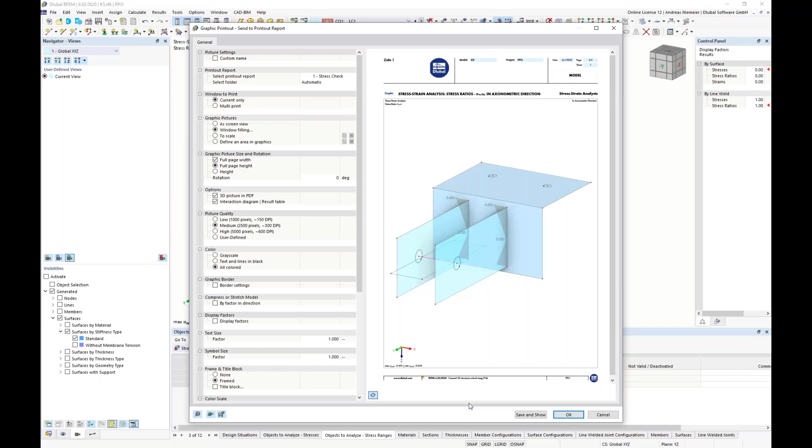And the same we are doing for line welds. So remove this, activate everything, and print again a picture with these diagrams of the utilization, and save and show, and get these two pictures in the printout report. Now we have these two pictures here in the printout report. Utilization of surfaces, utilization of line welds.

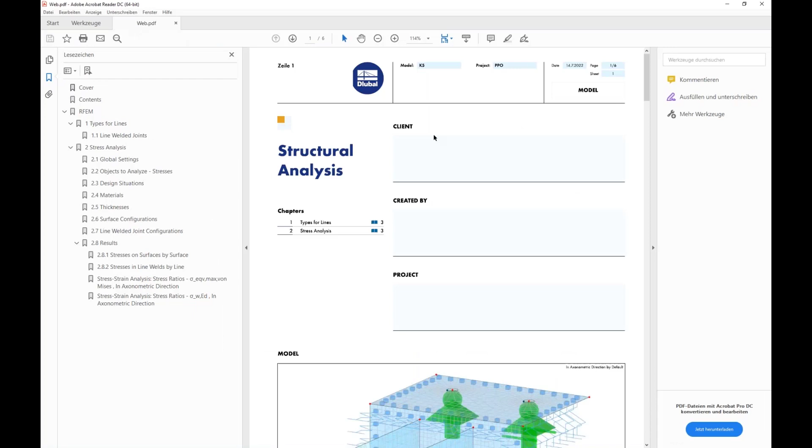And if you move this into a PDF, maybe on desktop, store, yes, then you get a document in Adobe Reader. Of course, this we already saw, content, these tables, but at the end we have these pictures. And as you see here, if your client reads it and wants to look behind this structure, he can rotate it and can look below. So no problem. The same also for these line welds. He gets much more information than on a sheet of paper.